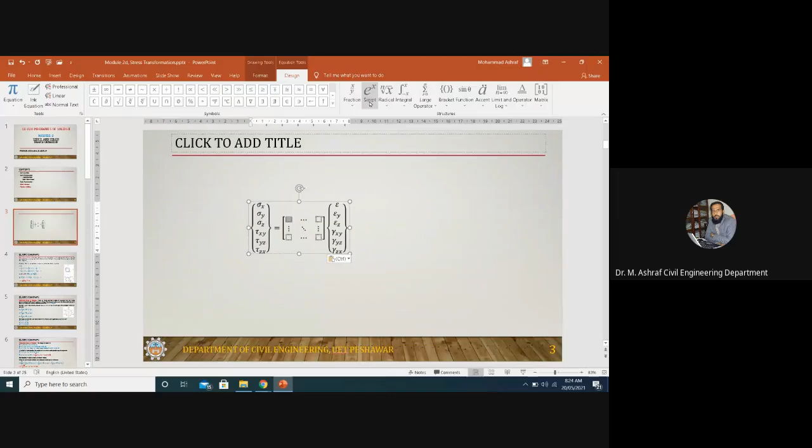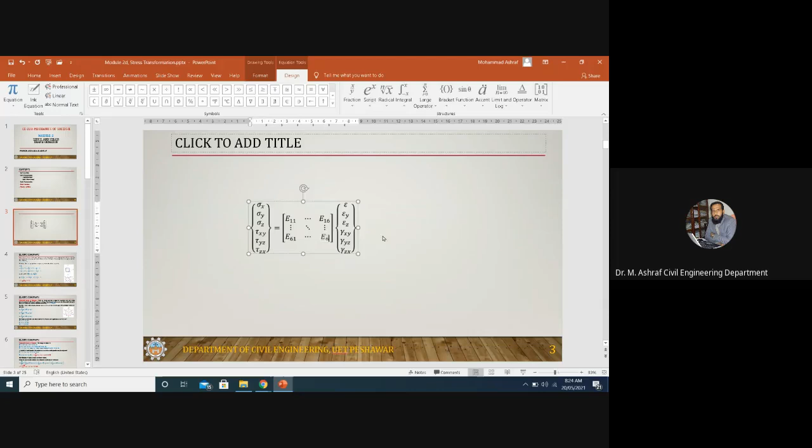Six. Six, one. Six. Okay, so this is the relation.

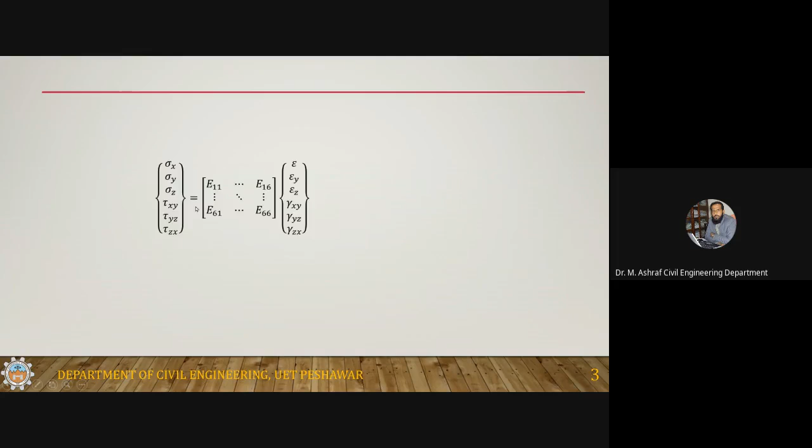This is a generalized form of the stress-strain relation. Let me just copy this. As a reference, I'll put it here.

So, stresses are related to strains, and the relation between the stress and strain is made by elastic constants.

Now, you know that in a three-dimensional state of stress, a maximum of 6 independent stress components exist. Corresponding to these 6 components, there are 6 strain components.

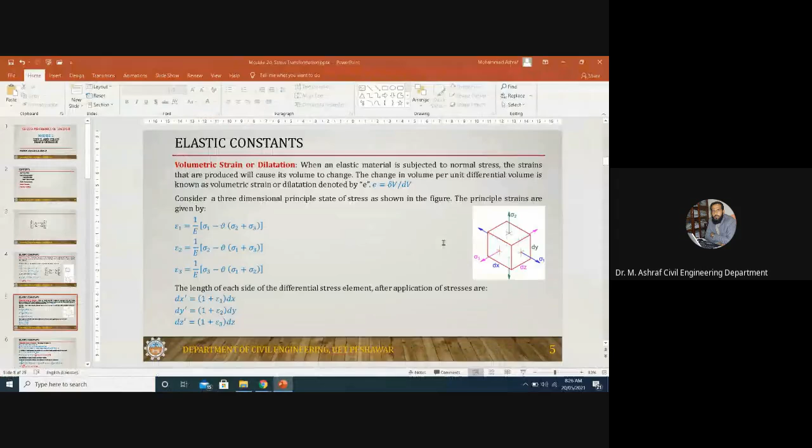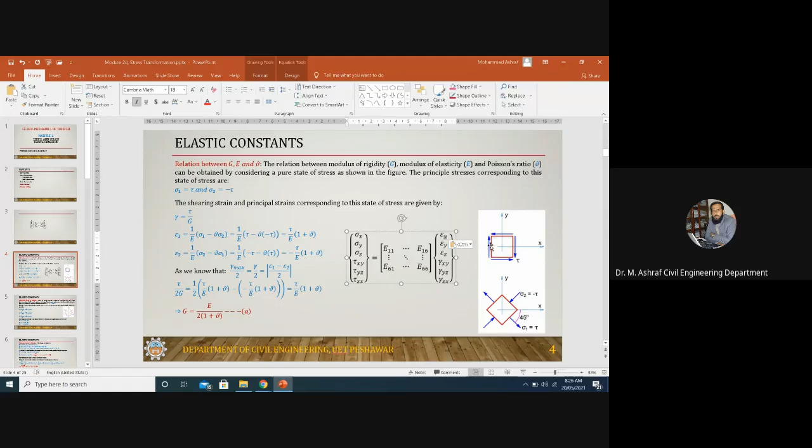Where is the subscript of this? So there are 6 strain components. These 6 strain components are related to the 6 stress components through elastic constants.

This is a 6 by 6 matrix, meaning that sigma x, the normal stress, is equal to E11 into epsilon x, E12 into epsilon y, E13 into epsilon z, and some of the components are 0.

The zeros exist because the normal stress is not related to the shear stresses. So there are first 3 components and then 3 zeros; similarly for the next rows 3 components and 3 zeros. Then tau xy is related only to gamma xy, so the rest are 0. Tau yz is related to gamma yz, and this is the case only for isotropic material.

If you count these elastic constants, this is a symmetric matrix. The number of elements in this 6 by 6 matrix is 36 components. But since it's symmetric, the right diagonal has 6 components, and there are 15 on this side and 15 on the other side.

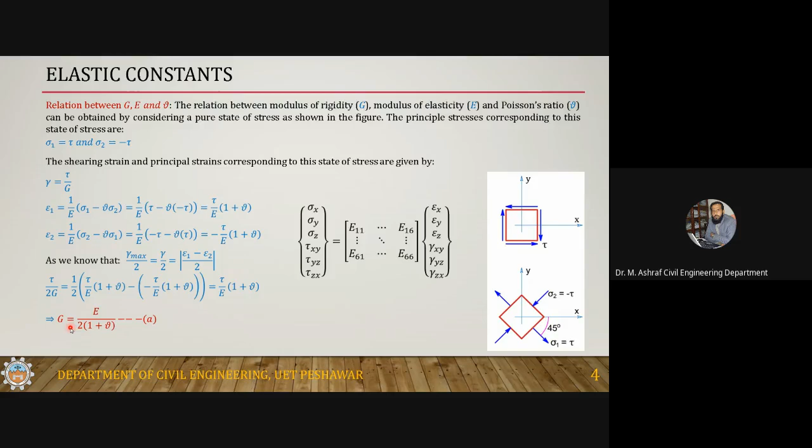Now next, there is another term which is known as volumetric strain, which is also known as dilatation. There is one linear strain like epsilon 1, epsilon 2, and epsilon 3. And there is another strain which is known as volumetric strain, denoted by the word E. What is volumetric strain? Volumetric strain is the ratio, the change in volume per unit volume - just like strain is change in length per unit length. So volumetric strain is change in volume per unit volume, and this is also known as dilatation.

So you know that for any state of stress, you can represent it in terms of the principal state of stress. You should remember this.

You can represent any state of stress in terms of the principal state of stress. If epsilon 1, epsilon 2, epsilon 3 are not known to you, yeah sigma 1, sigma 2, sigma 3 are not known to you, then you can get it from the stress transformation relation, that you can get these principal stresses. So if principal stresses are known to you, this is a principal state of stress in which sigma 1, sigma 2, and sigma 3 are the principal stresses.

So the strain corresponding to these principal stresses: epsilon 1 is equal to, this is a well-known constitutive relation, epsilon 2 is this one and epsilon 3 is this one.

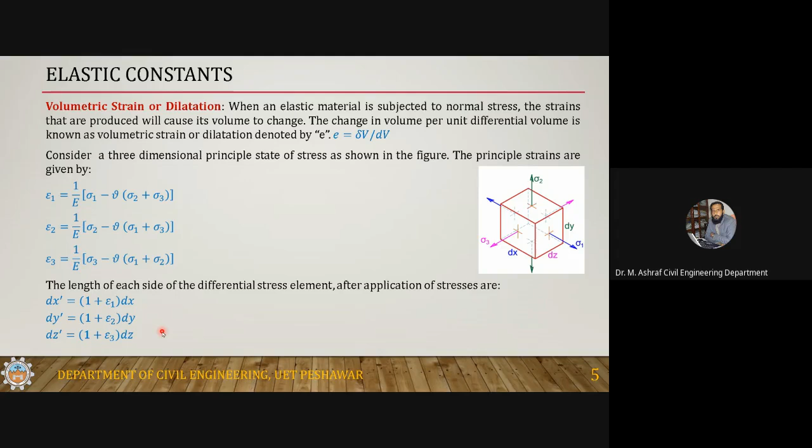So dx prime is dx plus epsilon 1 dx. Dx is the original length plus epsilon 1 dx, epsilon 1 being change in length per unit length, multiplied into the length will give you change in length. So this is giving you the changed length. Similarly dy prime is equal to this one and dz prime is equal to this one. So now you know the changed length after the application of these stresses.

Now if you just calculate the change in volume, how can you calculate it?

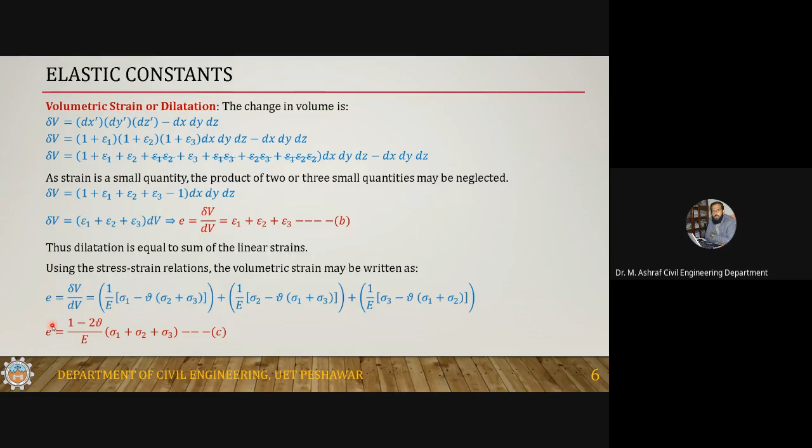Now coming to another modulus of elasticity, known as bulk modulus or volume modulus of elasticity. There is one modulus of elasticity which is E, the linear modulus of elasticity, or one-dimensional modulus of elasticity. Now, if we are talking about volume, there is a volume modulus of elasticity which is known as bulk modulus.

The bulk modulus is basically the ratio of a hydrostatic state of stress to the volumetric strain. If you have a state of stress in which all the principal stresses are same and equal to sigma, sigma 1 is sigma, sigma 2 is sigma, sigma 3 is sigma, this kind of state of stress is known as a hydrostatic state of stress. When all the principal stress components are same, that state of stress is known as hydrostatic. So the ratio of this hydrostatic stress to the volumetric strain is known as bulk modulus.

For hydrostatic stress, sigma 1 equals sigma 2 equals sigma 3. We know from the previous slide that E equals this expression. So you plug in the value of sigma 1, sigma 2 and sigma 3 as sigma, giving sigma plus sigma plus sigma, which is 3 sigma, times 1 minus 2 nu divided by E. If you simplify this and the sigma cancels, you are left with K equal to E divided by 3 into 1 minus 2 nu. This is the bulk modulus.

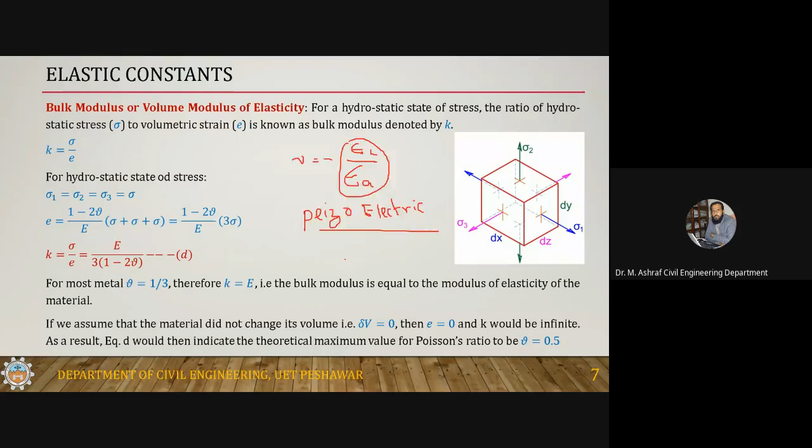So piezoelectric material, those materials have a negative Poisson ratio. This is an exceptional case. Negative Poisson ratio means it will be less than 0. So when one direction is elongated, the other two directions will also elongate. So this is the discussion about the bulk modulus, the volume modulus of elasticity, and these things.

Now let's have an example. You have a block. This block has dimensions: A is 4 inches, let's suppose B is 2 inches, and C is 3 inches. These are the dimensions of this block, and this block is subjected to a uniform pressure from all the sides, and the magnitude of the pressure is P equals 20 psi.

So this is like it's submerged in water where the pressure is 20 psi. Determine the dilatation, bulk modulus, and the change in length of each side. Take E, the modulus of elasticity, equal to 600 psi and the Poisson ratio equal to 0.45. So this is the case.

Now in this case, since this is submerged in water, the state of stress is a hydrostatic state of stress. So the principal stresses from all directions will be equal to the pressure: sigma 1 equals sigma 2 equals sigma 3 equals minus 20 psi, since this is compression. Uniform pressure is a compressive force if it is applied on a body from all sides.

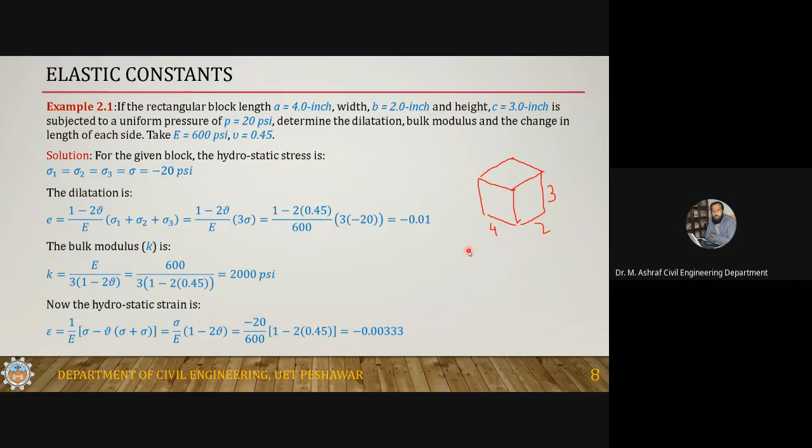Okay, so this is the strain. Now the change in length of each side, you can get by multiplying strain into the original length. Change in length of side A is equal to strain into the original length, strain into A, which is equal to this one. Change in length B is strain into B, which is equal to this one, and strain in C is equal to this one.

Okay, so this is the change in length of each side: 0.01333 inch, 0.00667, and 0.01 inch. So these are the change in length of each side. Okay, so this is a problem related to elastic strain. Any question?

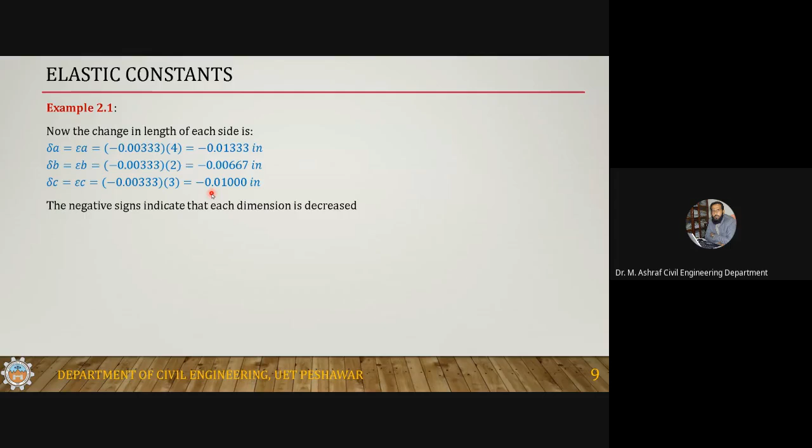Okay, now before going to discuss the theories, let's first discuss the concept of strain energy, the concept of elastic strain energy. What do we mean by strain energy?

Now, when you apply load to a body, stresses and strain will be induced in the body. When you apply force on a body, there will be stress and strain induced in the body, and due to this straining, there is a deformation. So when there is a force and there is a deformation, force times the deformation, or the displacement, is work done.

This work done is stored in the body as strain energy. The work done on a body by the external agency is stored in the body as strain energy. When you apply a force, there must be some deformation, so force times the deformation gives you the work done, and this work done is stored in the body as strain energy. And if the body remains elastic, not exceeding the elastic limit, that energy is known as the elastic strain energy.

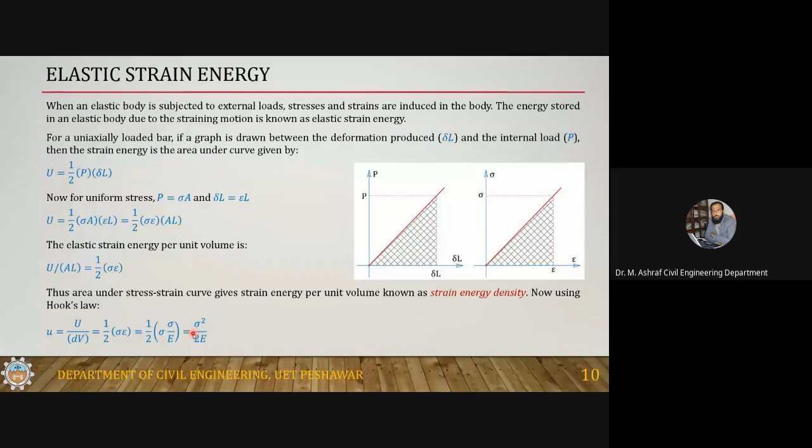If you have a state of stress and convert it into the principal stresses sigma 1, sigma 2, and sigma 3, then the energy, since this relation was derived for a uniaxial one-dimensional state of stress, but for a three-dimensional state of stress, the total strain energy using these principal stresses also represents the shear component.

Now the strain energy may be divided into two components: one is the energy associated with volumetric changes, meaning dilatation, and the other is the energy associated with shear distortion.

The linear strain tries to change the volume of the body, while the shear strain distorts the body, producing angular deformation and changing the shape of the body without changing its volume. The shear stresses and shear strains do not change the volume of the body, they only distort it, changing the shape of the body.

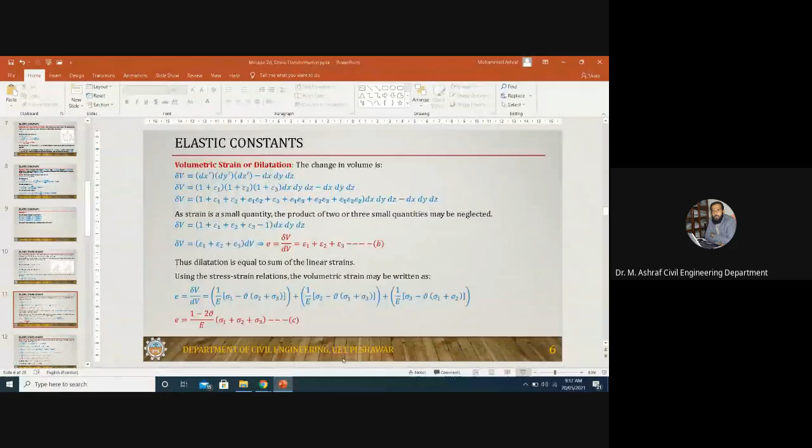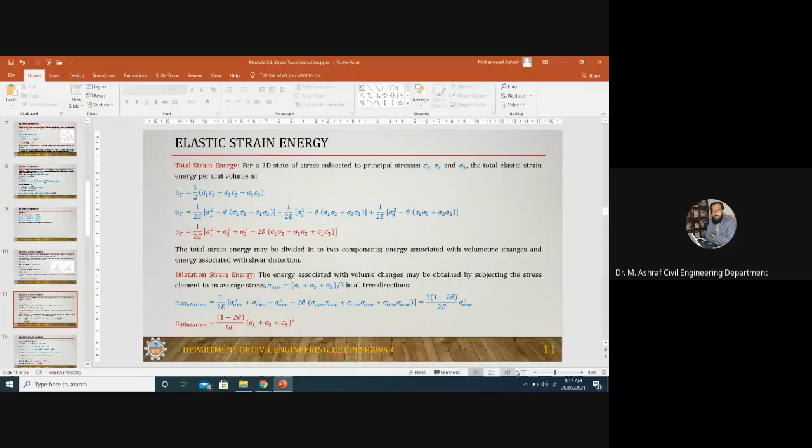Okay, so this is the energy associated with volume changes. Now coming to the distortion energy.

One procedure is that if you subtract - this is total energy minus this dilatation energy - it will give you the energy associated with distortion, because these are the two sources: one is the volume change, the other is the distortion. If you subtract U total minus U dilatation, it will be equal to this distortion energy UD.

But I'm getting this expression using another approach, directly from the energy associated with shear deformation. The energy associated with shear deformation, known as distortion energy, for a three-dimensional state of stress - the maximum in-plane shear stresses are: in the 1,2 plane this is sigma 1 minus sigma 2 by 2; in the 2,3 plane this is sigma 2 minus sigma 3 by 2; and in the 3,1 plane, sigma 3 minus sigma 1 by 2. These are the three shear components in the three-dimensional state of stress.

Now, the energy associated with the shear deformation, the distortion energy, is equal to - we know that for a unidirectional case, this is half of sigma into epsilon.

So this is for the shear: half of tau12 into gamma12 plus tau23 into gamma23 plus tau31 into gamma31. Just plugging in gamma12 equal to tau12 by g, and similarly the other two, you get 1 over 2g times tau12 square plus tau23 square plus tau31 square. Now plug in the value of tau12, tau23, and tau13 in this equation.

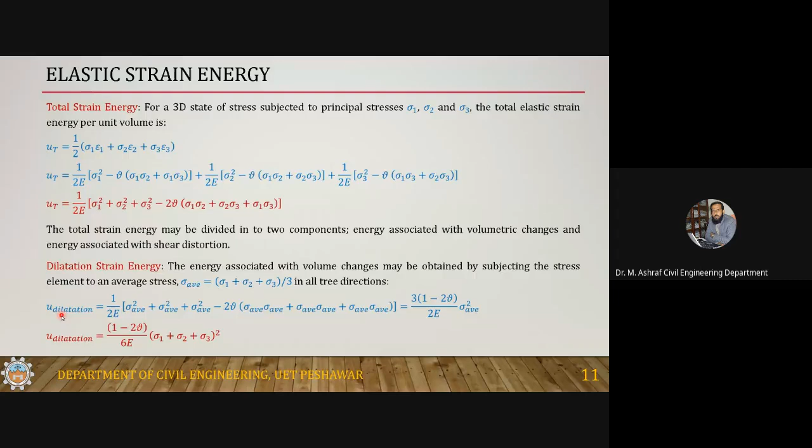So you can get this expression if you subtract this from this: ut minus u-dilatation gives the same expression, this one. So this is the case.

Now this is all about the strain energy. In strain energy we talk about the total strain energy, the energy associated with dilatation strain energy, and the distortion strain energy. The other concepts are not related to the failure theory; only the distortion energy concept is related to one of the theories. So we'll require these three equations, or especially these two equations, because we'll discuss the two-dimensional state of stress, so we'll require these two cases.

Okay, now theories of failure. Now what are theories of failure? Give me just a minute.

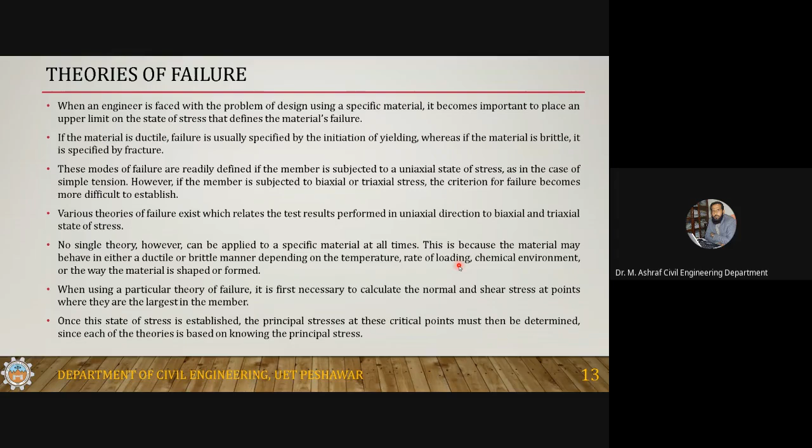So how do you use these theories, any one of them? You will have to define the state of stress and the critical state of stress, because in a body there may be variation in stresses, just like in the case of a beam, you have variation in stresses along the length of the beam. So you will have to select the critical locations, and at the critical location define the state of stress. Once you get the state of stress at that point, you will have to convert it into the principal state of stress, because all the theories are based on principal stresses. Convert that state of stress into the principal state of stress, and then apply those theories.

Now let's discuss some of the theories. The first theory is the maximum shear stress theory.

The theory results from the observation that a ductile material slips occur during yielding along a critically oriented plane. You might have observed this in your tensile test in your Mechanics of Solids course. When you perform a tension test, what happens in a tension test of a steel bar?

First, when you apply a load and gradually increase it, what happens? First, there is neck formation, and after neck formation, there is fracture. But that fracture is basically not perpendicular to the axis of the member - it is inclined to the axis of the member.

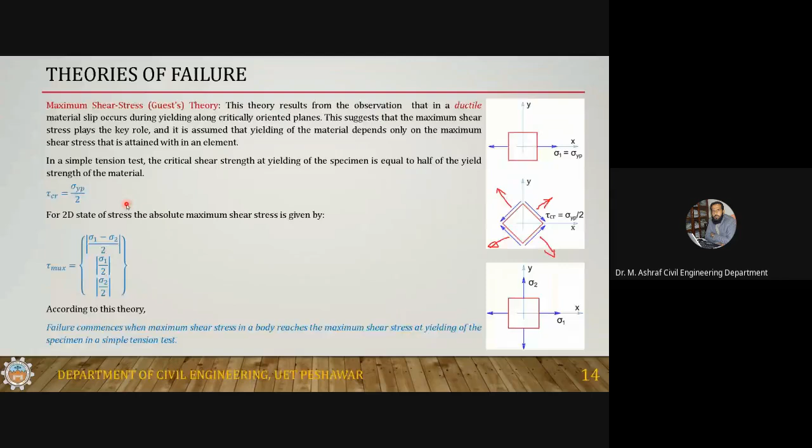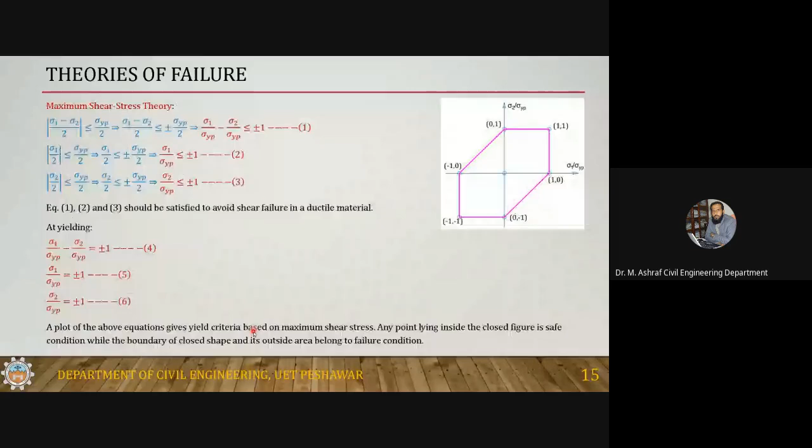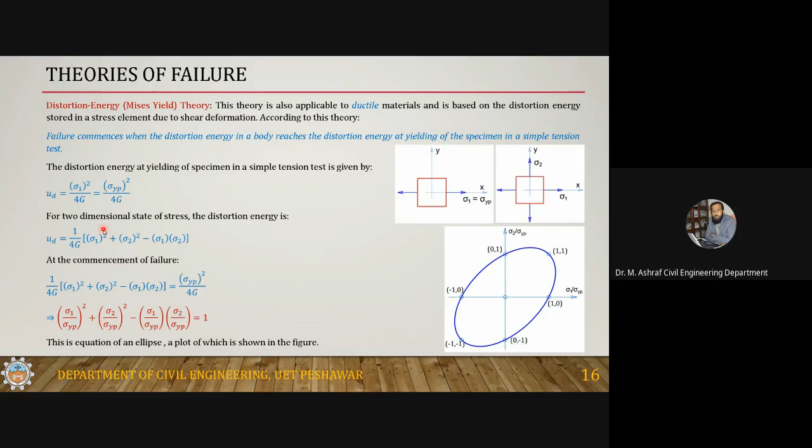The application of the theory is very simple. Calculate the distortion energy here, and calculate the distortion energy here. It's very easy to calculate. If you don't know this 4G, there's no need, because 4G is here and here. Just calculate this one and this one, then compare them. If this is greater than the other, it's failure. If it's less, it's okay. The actual condition should be less than the laboratory test value.

Thus, comparing the maximum shear stress theory and the distortion energy theory, one thing is clear from this figure: there is no large difference between the two theories. You can see this pink color is the maximum shear stress theory, and this blue color is the maximum distortion energy theory.

What is the reason? Maximum shear stress theory is directly related to the maximum shear stress, while the distortion energy theory is related to the energy associated with shear stress. Since both have shear stress in their components, their base is the same, so the difference is not too high.

Another thing from comparing these two theories is that this six-sided figure is inside the ellipse. They are just touching at a few locations, but otherwise this shape is entirely inside the ellipse. So if anything is safe against the maximum shear stress theory, like a point here, it will be inside both the ellipse and this six-sided figure.

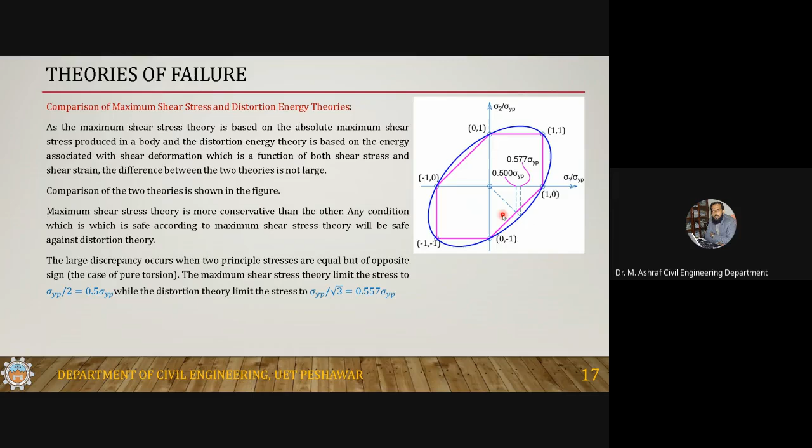So this is what we get when we compare the two theories with each other, and these two theories are applicable to ductile material. Now coming to the maximum normal stress theory.

Maximum normal stress theory. This is another theory, a third theory. Brittle material such as grey cast iron tend to fail suddenly by fracture with no apparent yielding. In a tension test, the fracture occurs when the normal stress reaches the ultimate strength of the material. Experiments on brittle material have shown that the ultimate stress at fracture is only slightly affected by the presence of orthogonal stress.

In the case of brittle material, suppose you apply a biaxial state of stress. If you keep sigma 2 at a certain value and increase sigma 1, there will eventually be a fracture. You perform this as one set. Then you remove sigma 2, apply sigma 1 alone and increase it, and there will be a fracture. When you compare the two results, there will be a slight difference or no difference between the two — in both cases, sigma 1 at the fracture will be the same.

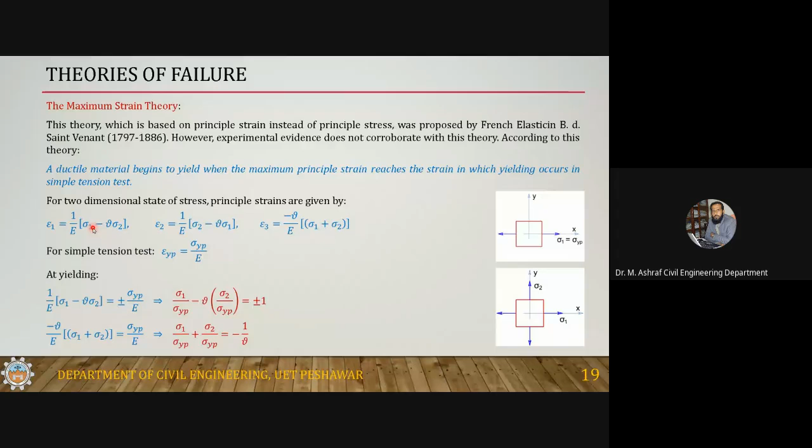This is against the maximum normal stress theory, which is dependent upon only the one directional stress. The other direction stress is not considered.

Now, tests were performed on different materials in different stress conditions.

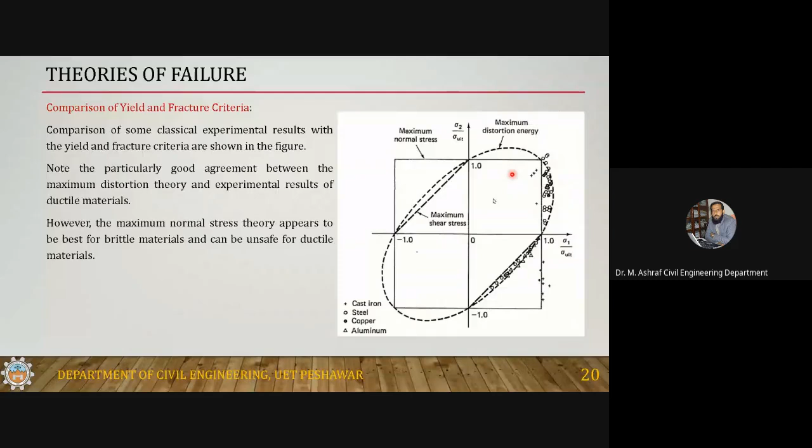You can have same strength both in tension and compression, just like in this case. This is defined for failure if you have same strength in tension and compression. But if you have different strength in tension and different strength in compression, then these theories are not applicable.

Some materials such as rock, cast iron, concrete, and soils have drastically different strength in tension and compression. Soil has 0 tensile strength but some compressive strength. Concrete's compressive strength is 10 times greater than its tensile strength.

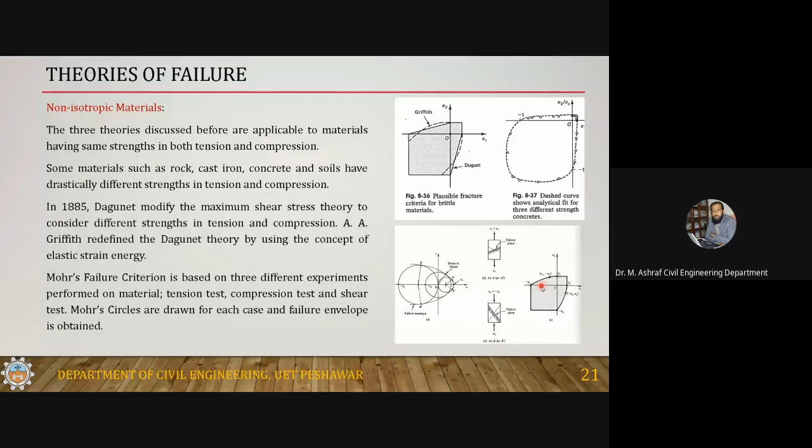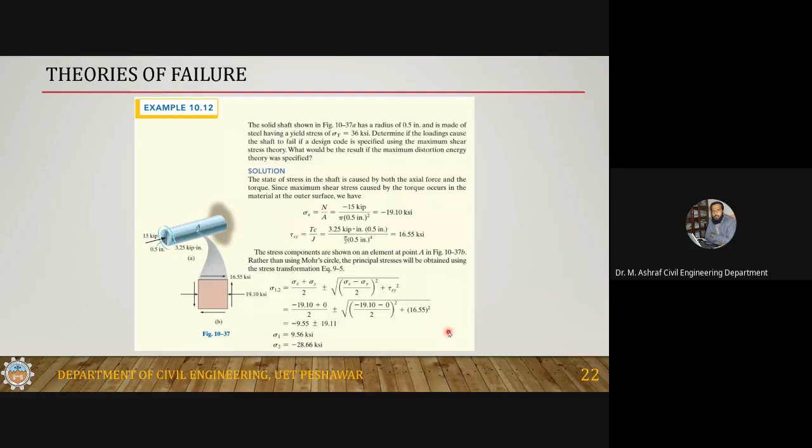So you will have to convert this state of stress into the principal stresses, and this is the equation. So you got the principal sigma 1 is 9.56 kSi and sigma 2 is minus 28.66 kSi.

Okay, so now you got the principal stresses. Now you can calculate the shear. Since according to the maximum shear stress theory, both sigma 1 and sigma 2 have different sign, okay, so this will go on. Either you compare this one or you just calculate the maximum shear stress.

So how to get the maximum shear stress? You calculate sigma 1 minus sigma 2 by 2, sigma 1 by 2, sigma 2 by 2. Sigma 1, since in this case sigma 1 minus sigma 2 by 2 should work because they are of different sign - this minus this will become plus. So this is 38.2.

Either this divided by 2 and then sigma yield by 2 also, or just remove the 2 and compare this with this one. So you got that this case is 38.2 is greater than 36, so it means that this is the failure condition. This is a fail, okay?

But according to the distortion energy theory, this is distortion energy: 1 over 4g into this should be less than or equal to 1 over 4g into this. So 4g cancels with 4g. So just compare this with this one.

So this is equal to, sigma 1 is 9.56, sigma 2 is minus 28.66. Just plug in, then you will get this one. So this is 36 square, so this is less than, so distortion energy is okay, because this side is less than this one.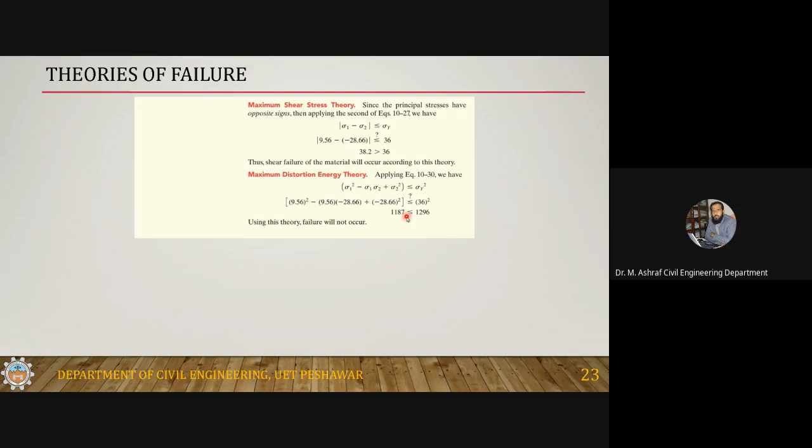Okay, now this is the last problem. The solid cast iron shaft shown in the figure is subjected to a torque equal to 400 pound-foot. Determine its smallest radius so that it does not fail according to the maximum normal stress theory. This is cast iron, and cast iron is a brittle material, so that's why he is using the normal stress theory. A specimen of cast iron tested in tension has an ultimate stress of 20 ksi.

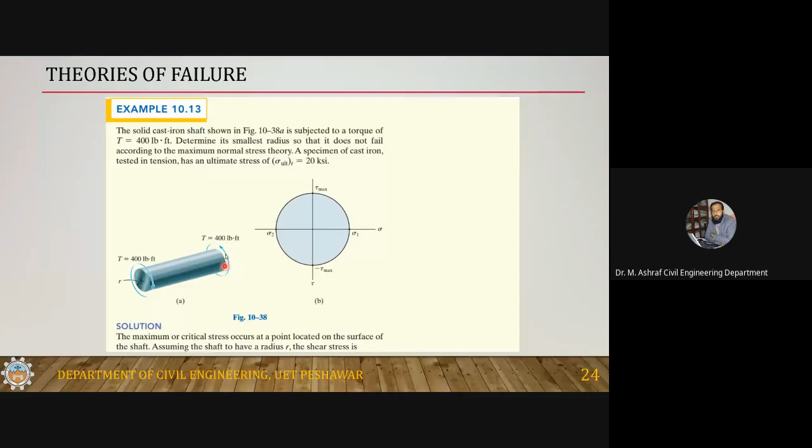Okay, so this is a solid shaft. It is subjected to a torque of this one. Its radius is R, and R is unknown, but he has mentioned the ultimate strength, and you'll have to calculate these stresses. So the maximum - the only force applied to this shaft is the torque.

So the state of stress will be a pure state of stress. Tau maximum is equal to Tc divided by J, so it is in terms of R, but the state of stress is like a pure shear state of stress. When you just convert this pure shear state of stress to the principal, then you will get this one.

If this is tau, then sigma 1 will be equal to tau, and sigma 2 will be equal to minus tau. So here you can see that for this case, tau maximum is this one. So sigma 1 is minus sigma 2 because sigma 2 is negative. So sigma 1 is minus, both of them are equal to tau, is equal to this one.

Now, according to the normal stress theory, sigma 1 should be equal to sigma ultimate. So just make this equal to sigma ultimate, which is 20,000 pound per square inches, and get the value of R. So the radius should be 0.535 inches. If the radius is less than this, so according to the normal stress theory, it will be a failure condition.